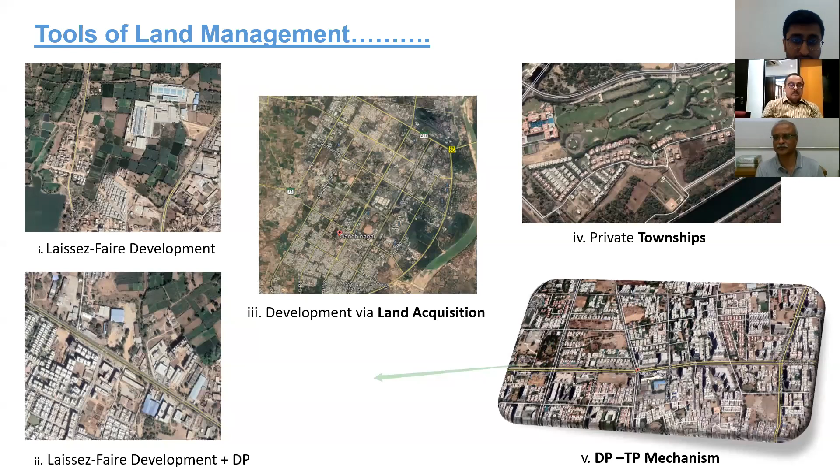The DPTP mechanism is much appreciated and successfully practiced, and this transformation mechanism has been used in Gujarat for more than a century now. I'll give you further detail in the next slide, but it dates back to the Indus Valley civilization. Why Indus Valley civilization?

Because at that time there was a grid pattern with access to basic infrastructure like sewerage, stormwater drainage, and water distribution network. When civilization started, the decision makers always considered the priority of health indirectly. Sewerage and stormwater drainage were originally present in the civilization valley - we get lots of documents and proof of this.

The current system evolved in the late 19th and early 20th century during British rule, as a response to the challenges of rapid urbanization. Its roots lie in the thought process of safeguarding the British army in colonial countries from epidemics like cholera, plague and malaria. Why did this new urban planning start? Because Britishers in colonial countries wanted to safeguard their military - they were living in England but wanted to control different countries in Africa and Asia. So from a far distance, they were more dependent on their army, and whatever they did was to safeguard their army - that's why this new form of urban planning started.

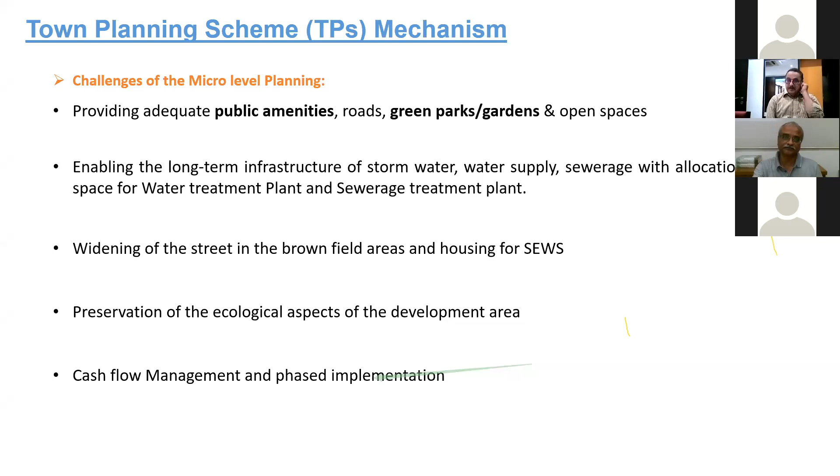Emergence of newer challenges in micro level planning. Why these new challenges? Because of COVID, we are rethinking micro level planning and particularly how we want to make changes in town planning schemes - managing peripheral urban growth, redevelopment and rejuvenation of older city Gamtal areas. Now the red zone in Ahmedabad is maximum in the Fort Wall area or Gamtal area. How to overcome such a pandemic situation through TP scheme is one of the challenges.

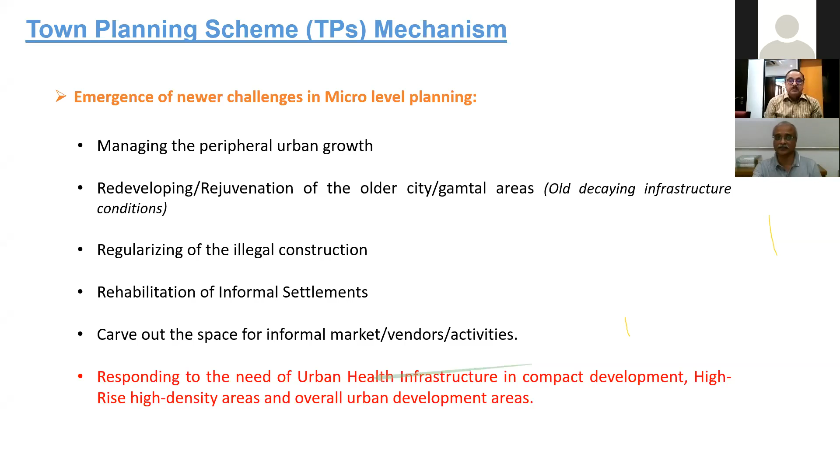Regularization of illegal constructions, rehabilitation of informal settlements, carving out space for informal markets, vendors and activities. Responding to the need for urban health infrastructure in compact development, high-rise, high-density areas and overall urban development areas. This point is very important as far as thinking about the town planning scheme for the coming time.

Over the past decade, we have witnessed the rebirth of an important relationship between urban planning and public health. Initially when urban planning started, we know it was started because of public health. Now it is time to again rethink the relationship between public health and urban planning, and how we can improve public health through urban planning or micro level planning.

Urban planning was itself a health response to poor living conditions in the urban development of the very early industrial era.

Why is integration of health and urban infrastructure important in planning? To address the risks and challenges arising from rapid urbanization. Tackling the growing burden of disease and health inequalities. To improve the ability of a place and its people to prepare for, withstand, and respond to a hazard, epidemic or pandemic. This last point is very important - how we can improve the ability of a place through the town planning scheme. I will discuss it in the next slides.

The integration of health and urban infrastructure is important in planning.

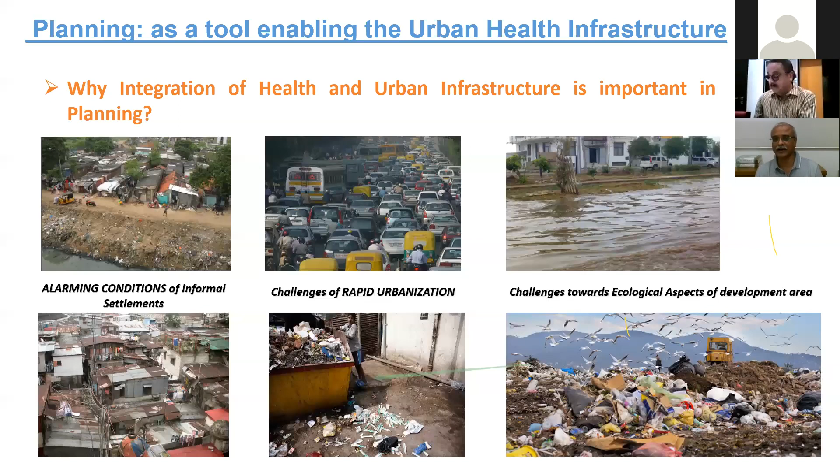So trial and error is always there in urban planning, as well as in the relationship between health and urban planning.

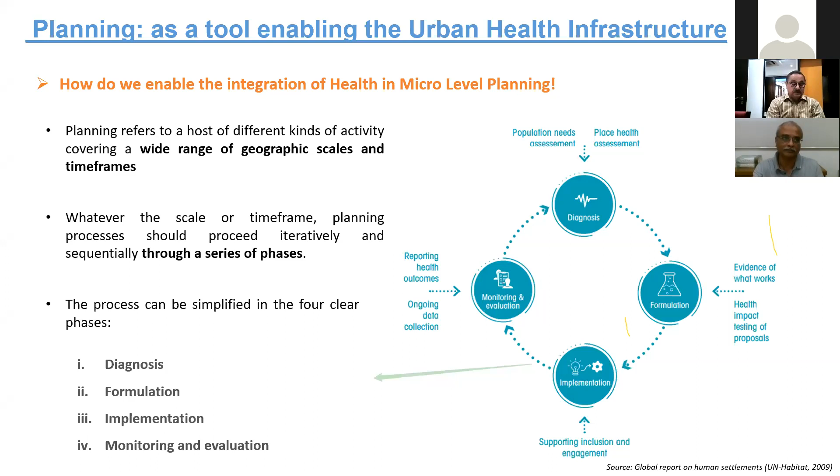Planning is a tool enabling urban health infrastructure, with three enablers: place, people and process. For place, we make proposals. For people, we make regulations. For process, we need finance. Accordingly, decision makers and stakeholders will behave and act.

And again we revise it: for place, the proposal; for people, we revise the regulations; for process, we revise our financing and controls.

Planning guidelines and standards can be improved through planning, such as housing density guidelines in relation to facilities, and building standards like daylight, air ventilation, insulation, and noise, all of which can be modified time and again.

Plans and strategies at the city and regional spatial level involve implementation, monitoring and evaluation. Planning as a tool—probably you can see this slide, but the major points are covered in bigger font.

Planning creates more socially inclusive places, better connected places—all such points can be achieved through proper Town Planning scheme mechanisms. This includes institutionally integrated planning, more compact places, well-designed and accessible green, blue and public spaces, planning better connected places, ensuring adequate access to health infrastructure, integrating environmental considerations, and planning places more resilient to climate change and natural disasters. All these points can be covered and addressed through town planning schemes.

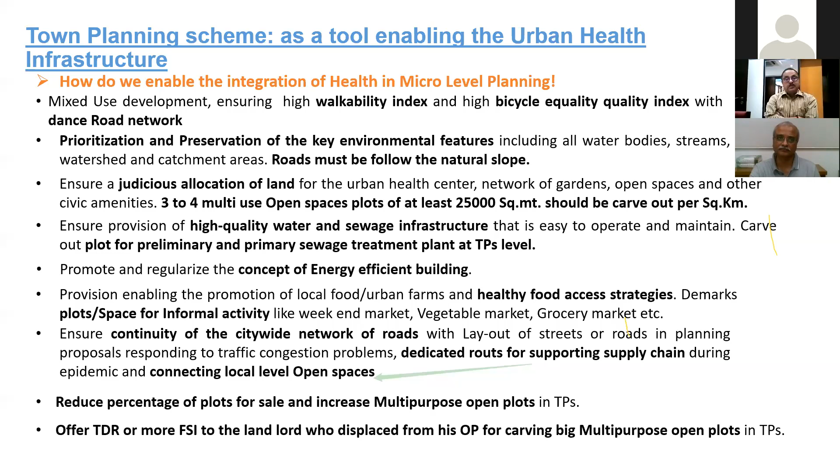Because of this planning intervention, we can get highly walkable neighborhoods, diverse land use mix and street connectivity. Because of the few points I suggested in the TP scheme, we get this type of result. Stimulating a healthy food environment and healthy climate, and aiming to discourage smoking, to reduce noise and air pollution and to promote physical activity.

See, when I was writing this, smoking is really an issue; you can say it is a social issue. Smoking is a social issue. During this lockdown, the pan gallas and everything were closed. Still, the smokers got cigarettes from the black market. But actually, lots of smokers I know accept that because of this type of lockdown, they reduced smoking or quit smoking. This is very important.

Instrumental in tackling the issues emerging with rapid urbanization and development by the preservation of ecological aspects of the planning area. Originally in the town planning scheme, we were not respecting the water bodies. But now, for the last 20 years, in whichever new town planning scheme we make, we preserve the water body and we make a garden or green space all around the water body. But we forget that we also have to safeguard the catchment area of that particular water body. So in the town planning scheme, we have to make such small changes, and ultimately we achieve the sustainable development goals and protect the ecosystems.

So for me, local area plan is keeping the city within the city. Now, LAP is not a new concept for the worldwide. It is a result of an ongoing process, not a planned process. Basically, development dynamics keep changing with time and growth. Keeping these dynamics in mind, the LAP for a particular city has to be planned and evolved.

Now, looking worldwide, LAP is not new. LAPs are prepared for different purposes: to protect the important qualities of the town, for distinctive precincts, for sustainable transport strategy, for sustainable mixed use like TOD policy, that's what we are doing, and special development areas. It can be cultural, heritage, or economic value.

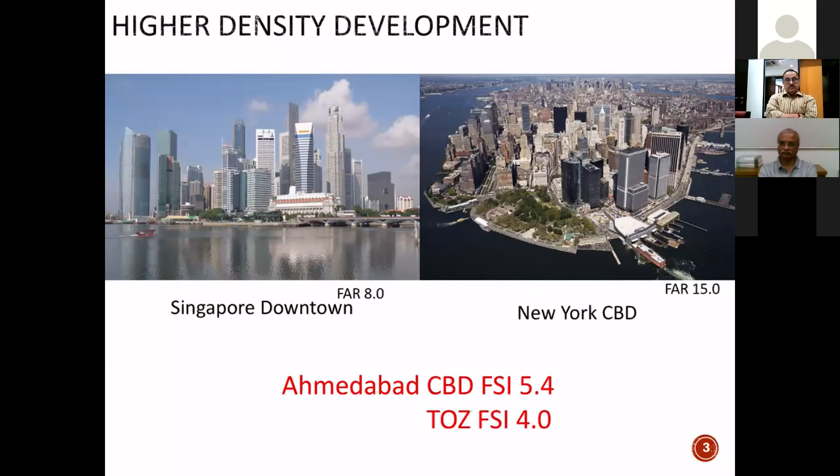Now, if we see the different cities in the world, they have reached up to FAR 8 or 10 or 15. So they have already evolved somewhere. The planning process has evolved time by time, and they have reached this level, and we are in the process of the same. Our city is still a developing city, and we are evolving the different processes.

Now, for managing the densification of Ahmedabad for the CBD and TOZ area, Ahmedabad has adopted this practice for implementation of the LAP. Basically, we have proposed the CBD and TOZ in the development plan, and we are planning the local area plan for this LAP area.

Now, the major idea behind the local area plan is to manage the growing density development, to provide efficient use of ground, to provide sustainable infrastructure, enhance and give an enjoyable ambience and public places, accessible and efficient transit connectivity, and provide the green transit network.

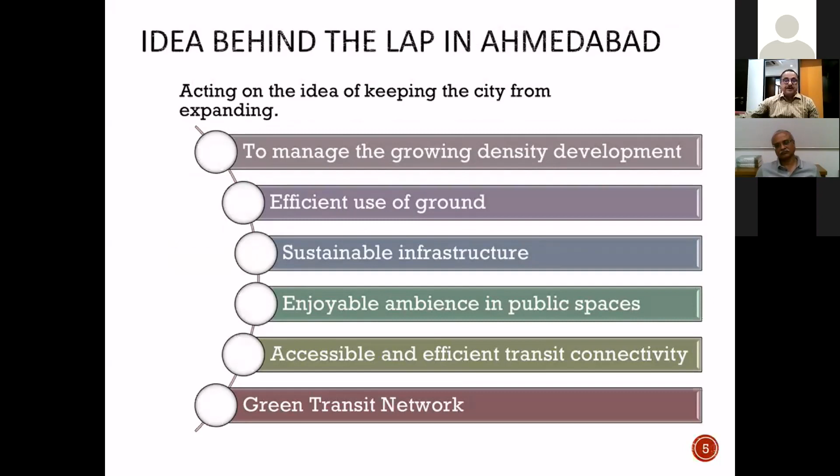Now, if we understand LAP, basically it's a sustainable community where people want to live and work now and in future. In terms of planning, if we redefine the existing developed, undeveloped, or developing area in terms of accessibility, walkability, connectivity, and plan for the future infrastructure, amenities, and utilities to sustain the future density and growth, that we can say is the local area plan.

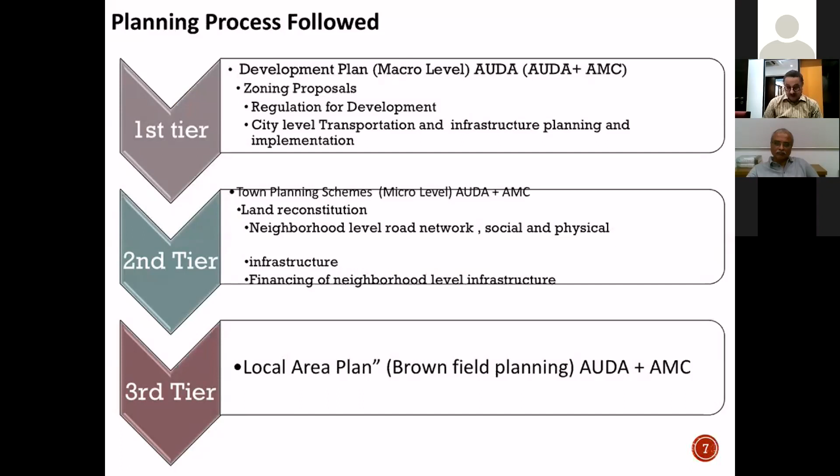As my senior officers and colleagues already explained, we are following the three-tier planning process. Earlier, we followed a two-tier planning process, the development plan and town planning scheme. And now we have added the local area plan, which we basically call the brownfield TP scheme or special area development.

Now, the Gujarat Town Planning and Development Act 76 was amended in 2014, and the local area plan has been added in it as section 76A. In that, the statutory provision has been explained very well. The process is the same as the town planning scheme mechanism.

We have to publish the boundary, we have to make a plan, then we call the stakeholder meeting and invite objections and suggestions from the people. We consider the objections and suggestions, modify the LAP accordingly, and the same shall be published in the official gazette again for inviting objections and suggestions, and finally that plan shall be submitted to the government.

Now let's understand how Ahmedabad has done this process, and it is the pioneer for this local area plan. So how have we done this? I would like to start with the development plan concept. When we were preparing the development plan, our focus was on compact city planning, and the pivot was public transportation. So vertical development was a must, and Ahmedabad proposed the transit oriented zone and CBD zone in this area.

The total Ahmedabad Municipal Corporation area earlier was 190 square kilometers. In 2008, it was increased to 450 square kilometers. And recently, we have added some more areas in the corporation limit, and now it is 503 square kilometers, while the AUDA area is 1866 square kilometers. The development plan was published in 2013 and sanctioned in 2014 by the Government of Gujarat.

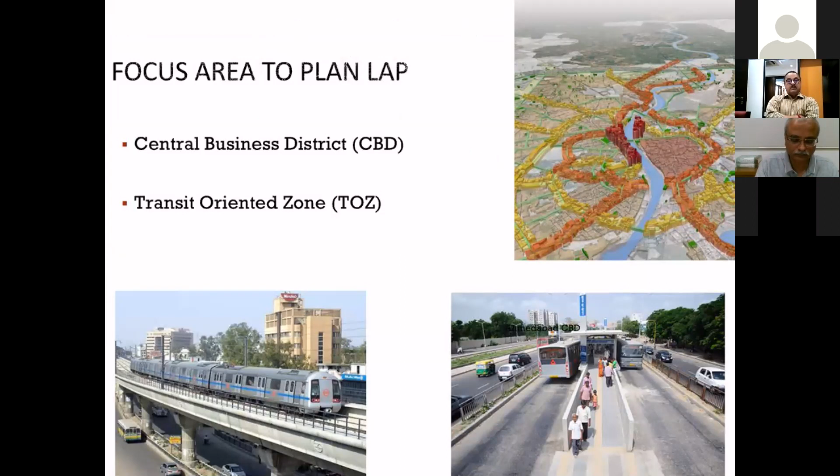When the government sanctioned the development plan, our major proposal was the CBD, Central Business District, along Ashram Road, and on the eastern side near the Gandhi Bridge, and the transit oriented zone, a buffer along the BRTS and metro corridor. The TOZ area is spread all over the city, and the buffer is almost 40 square kilometers, where the MRTS length is 40 kilometers and BRTS is approximately 120 kilometers.

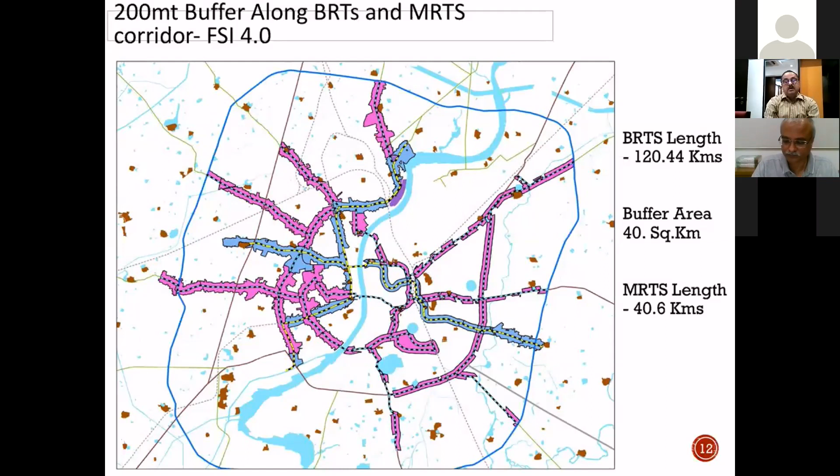So for ease of planning, we divided this whole area into different small components. The area can be predominantly residential or predominantly commercial, depending on the characteristics. We can plan specially for that area, and we can also give a special GDCR for each plan.

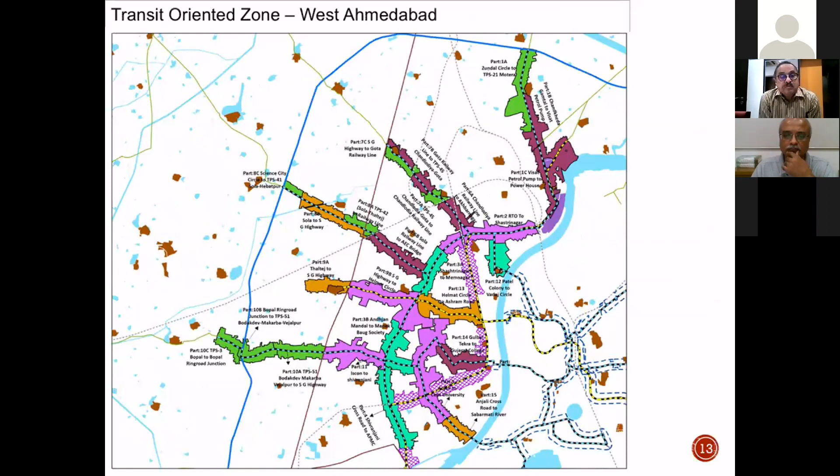Now, basically, when we are saying the local area plan, we want to improve the quality of life. We want to enhance the existing situation where we are adding up the new FSI in the city, which is the existing city. Already the development plan is there since decades. Already the town planning scheme mechanism has been prepared and implemented since years back, and the area is already developed. How can we enhance the quality of life so the city can be sustainable for future densification?

So in that, we are adding spaces for the public realm. For that, one thing is we can add on space for public places and make our public transportation sustainable. As well, we can improve the pedestrian spaces by improving the street network.

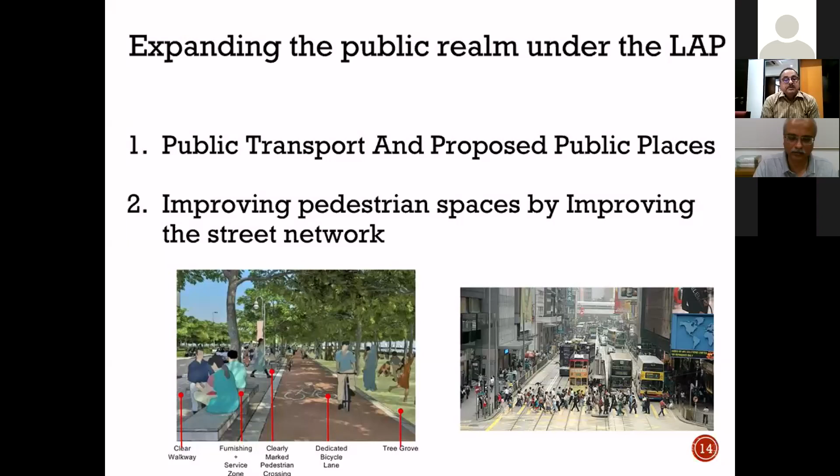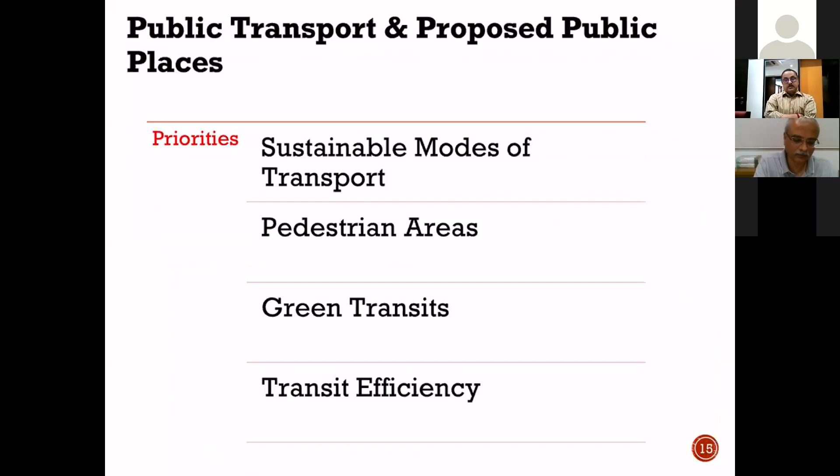Now, when we talk about sustainable public transport or enhancing the public transport, basically, we are adding space for the pedestrian area, enhancing green transit, increasing transit efficiency, and trying to provide last mile connectivity. Even for the sustainable mode of transportation, we have to relate the different modes of transportation, how we can best efficiently use the different modes of public transportation.

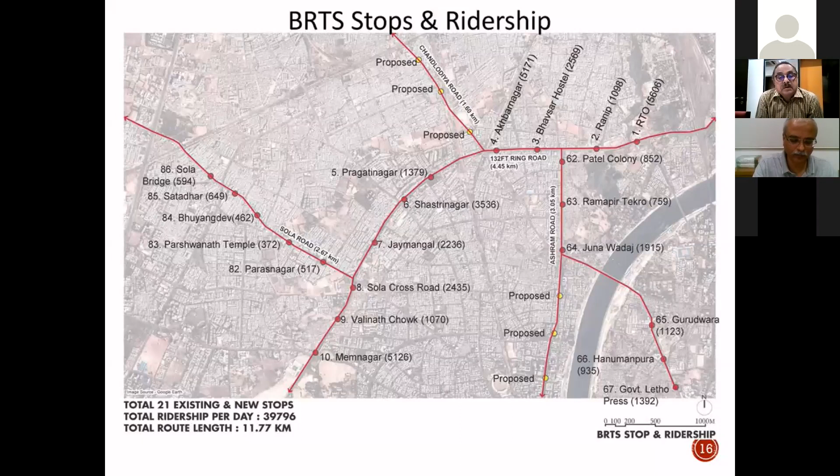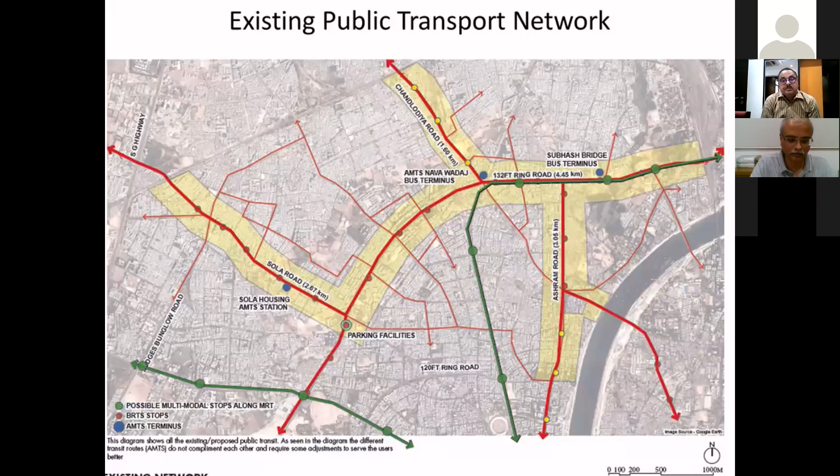This is the existing AMTS route in the same area. And these are the existing public transport networks: the green is the MRTS line, then AMTS and BRTS lines. So how efficiently can we use this public transportation? We have added new connections within the local area plan area, within the transit corridor area, as well as between two transit corridors. So between two local area plans, the area in between is also very important for us, and how we can enhance public transportation in that area. That is our first lookout.

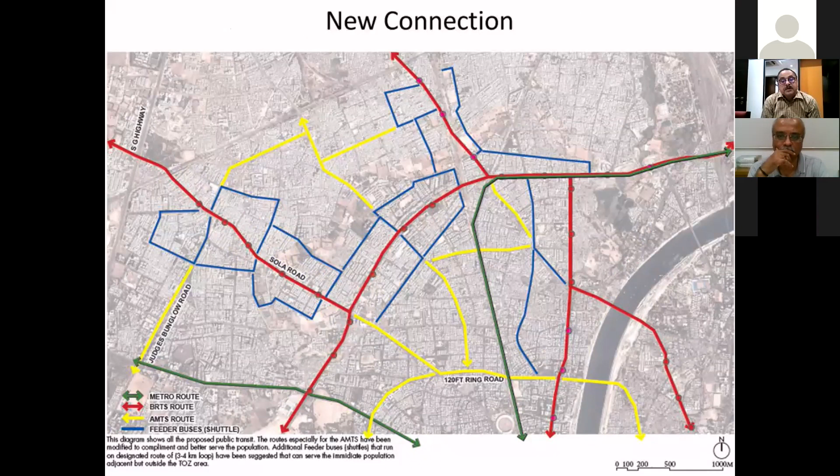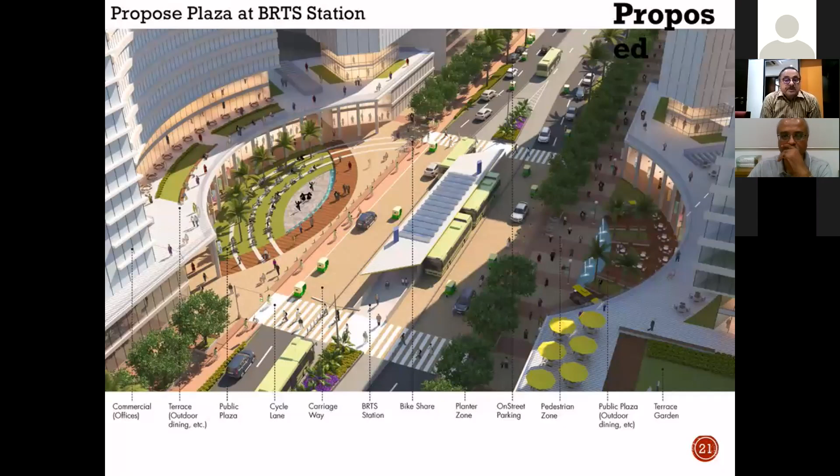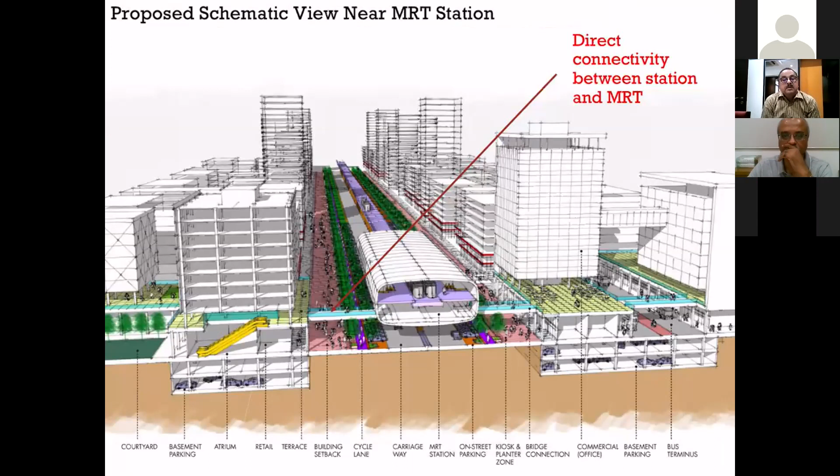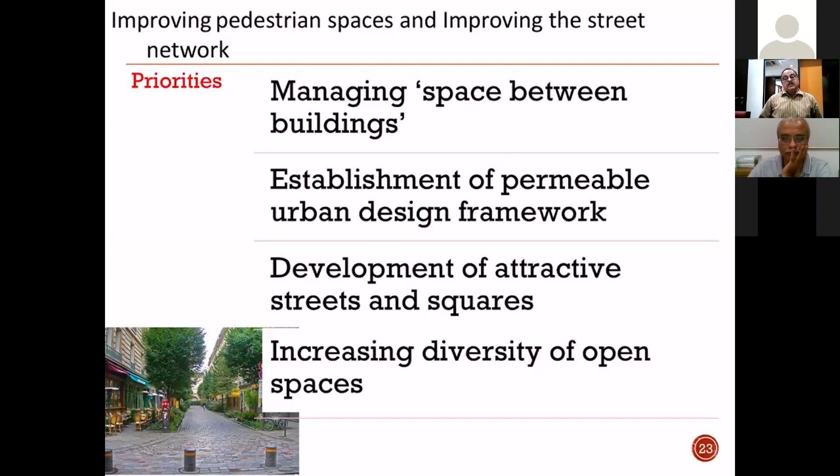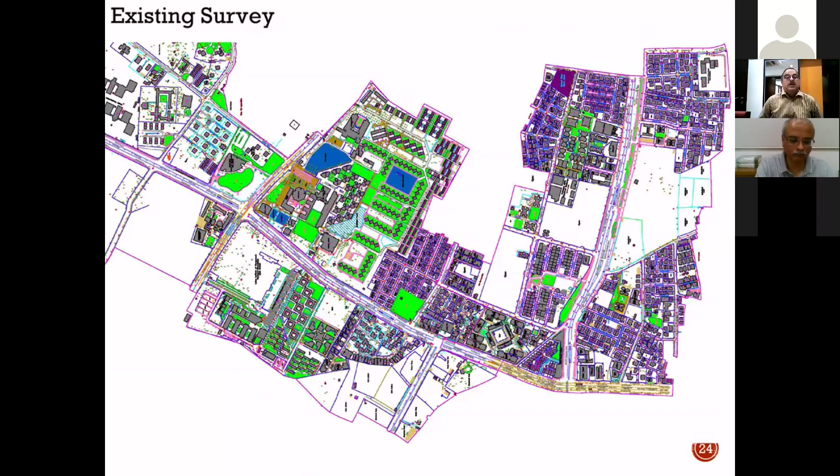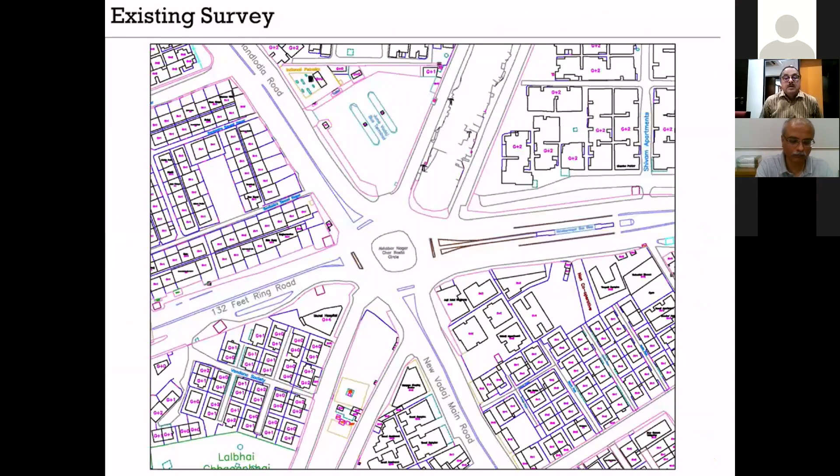Now second, our criteria is to improve the pedestrian space and improve the street network. So basically we are managing space between the buildings. We are providing a permeable urban design framework, the development of attractive streets and squares, and increasing diversity of open spaces. For that, a lot of studies and analysis have been done, but our base work is the total station survey. So a fresh total station survey has been done, in which we have taken care of all the physical parameters: road network, building typology, building height, and all the physical aspects existing on the site.

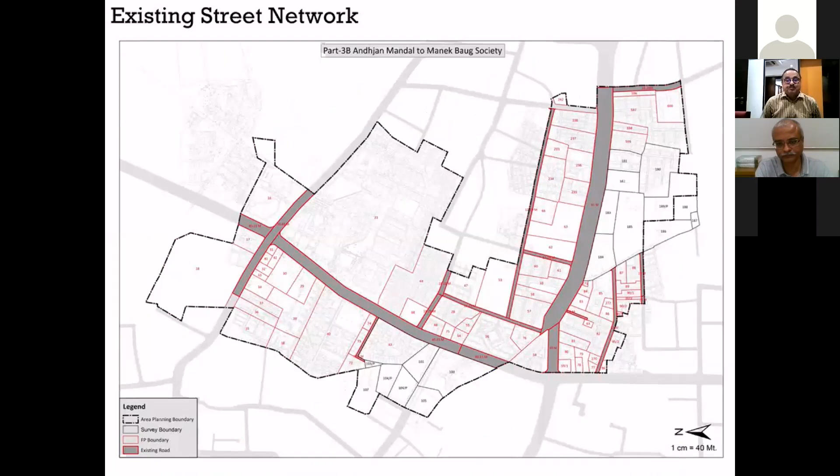This is the existing street network. When we have laid down the development plan roads, gray is the TP scheme road. As we all know, Ahmedabad has been following the town planning scheme mechanism for years; in Gujarat, we have been following the town planning scheme for 100 years. So we have a very good existing street network, with defined final plot boundaries and regular shape and size plots. But now how to enhance this area and make it more sustainable for the future FSI? That is the question.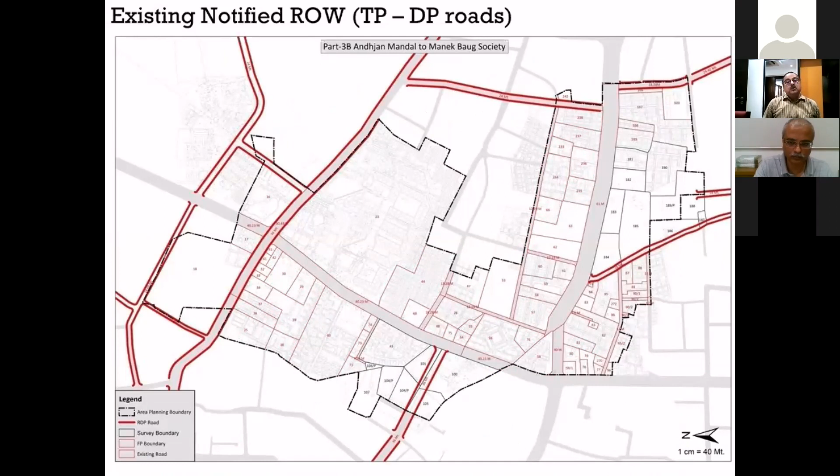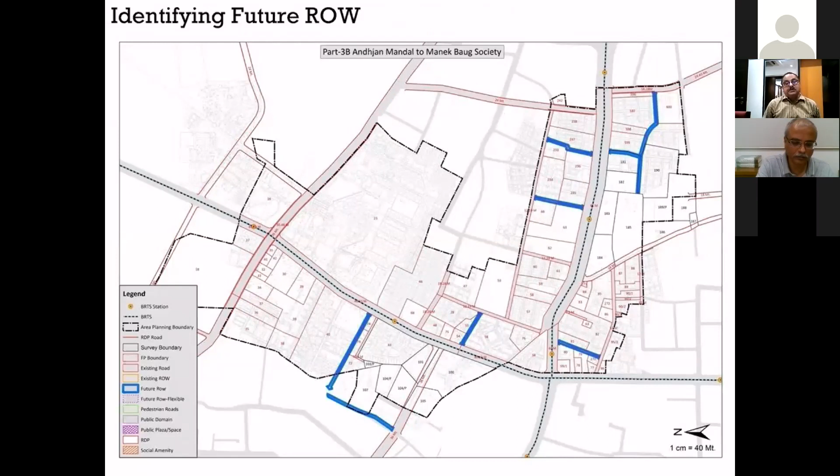So we have added a few future roads. As I said, this is managing the space between the buildings. Between two final plot boundaries where space is available, and where it is required to connect with the public transport corridor, we have planned new connections. So new ROW has been proposed.

Another new concept has been introduced in this local area plan, that is the flexible road. Now, what is a flexible road? Earlier, when we put a red line or some road network, it was fixed that the road will pass through between this and this alignment.

But when we say flexible road, it means a large chunk of block under one ownership. It can be a trust, it can be an educational institute, or it can be a large private society. For example, it can be Gujarat University, it can be Gujarat Housing Board, it can be a large private society which has potential for redevelopment.

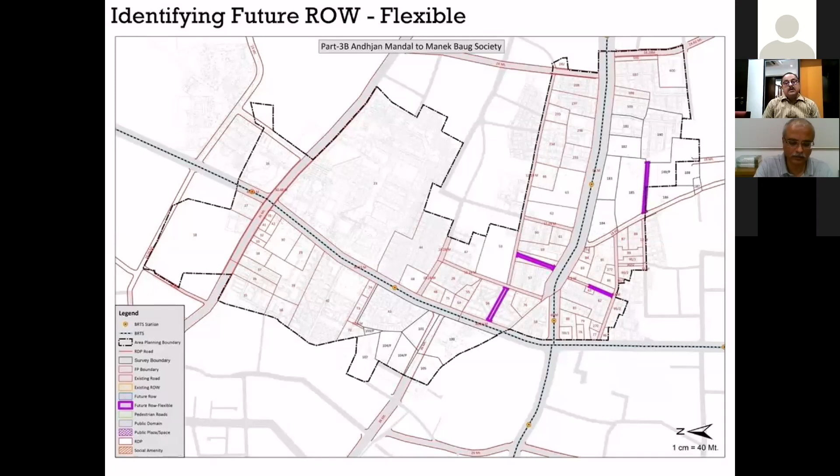And now as they are getting the 4 FSI, whenever they go for redevelopment, they have to give a connection between A to B, from the public transport corridor to the end road. And that road they can shift 25 to 50 meters on either side for ease of planning and ease of architectural design. We have also identified a few pedestrian connections.

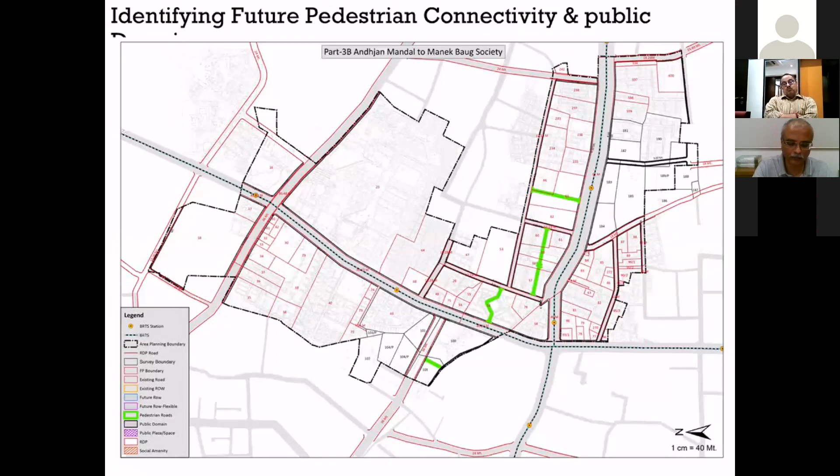It can be the society road. It can be the small, narrow 3-meter, 4-meter wide street between the buildings. For that, we might need to remove the existing compound walls, or remove the gate between the societies. In this whole process, we have reduced the block perimeter.

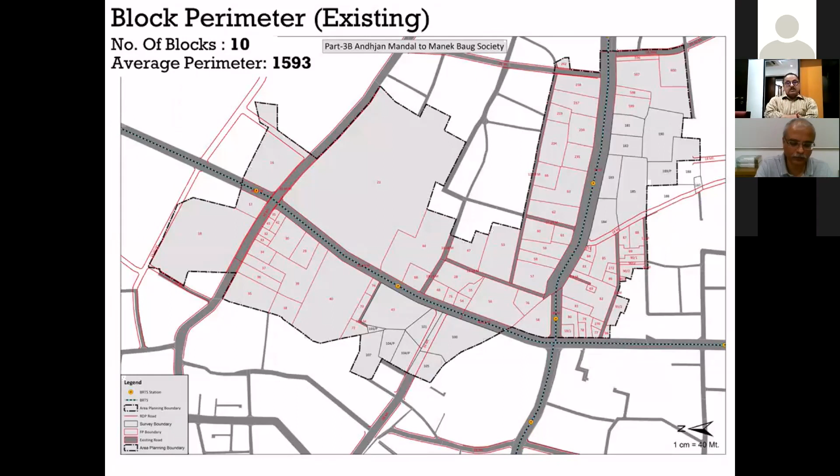And one more concept we have introduced that is quite important, that is the public domain, the space for the pedestrian. The whole crux of this planning is how to enhance public transportation and how to provide space for pedestrians, how we can provide better space. So in this, we have introduced in our GDCR that we are giving the front margin. Each final plot needs to keep its front margin open.

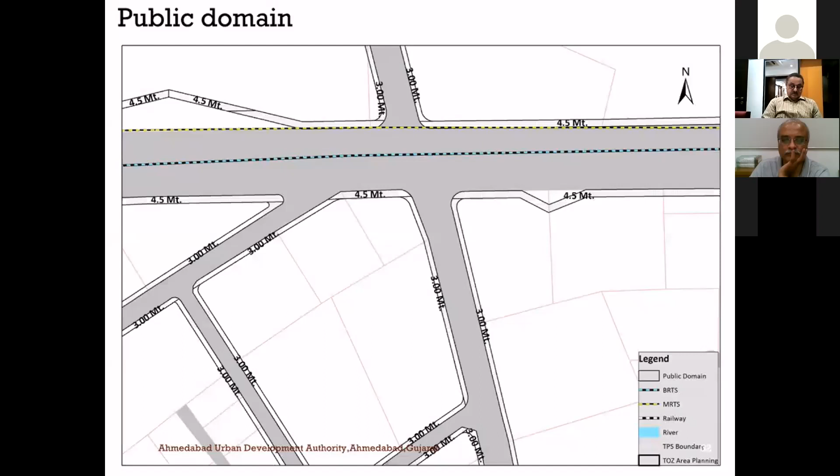From that front margin, if the road is up to 18 meters wide, they have to keep 3 meters of space for the public domain. And if the road is more than 18 meters wide, they have to keep 4.5 meters of space open for this public domain area. And that space might be used for a future street or pedestrian walkways. Now, even the side and rear margins shall be part of our future street.

As I say, a future road can be a large 9-meter road, it can be a 7-meter road, or it can be a small street. Pedestrian or cycle movement can be accessible from this marginal space.

And finally, we prepared a plan in which we identify the public plaza, that is the small purple dot, and the social infrastructure, the brown hatched plots. Now, the plaza can manage the spillover of the major transit station, and the social infrastructure can provide future amenities to the citizens. It can be for parking, a fire station, a police station, or other future requirements as per the city's need.

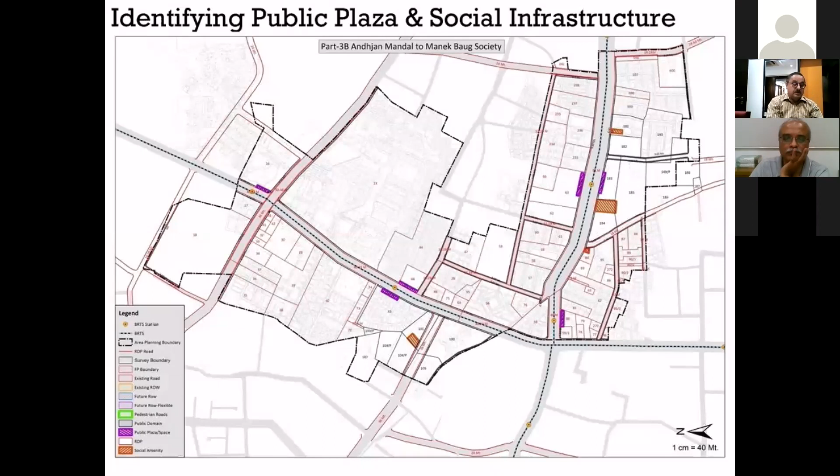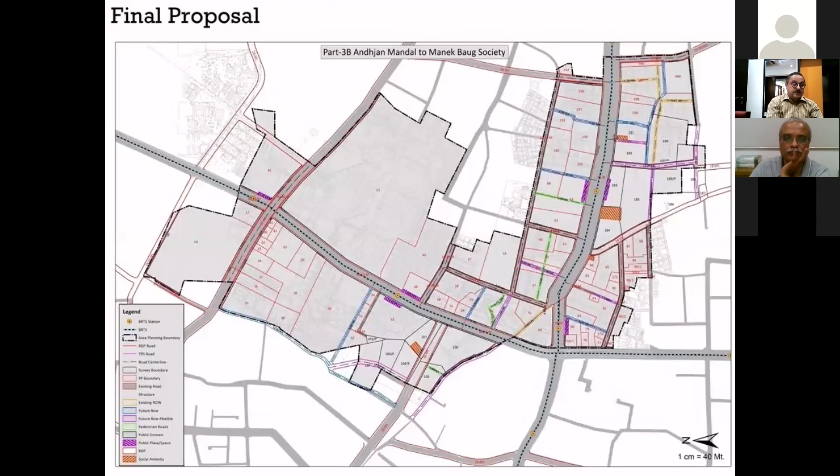Now, the final proposal, which incorporates the road network, plaza and social infrastructure, is prepared and kept open for stakeholder consultation. So all people can come to our office. They can check their plan, and they can give their objections and suggestions within the 15-day period. After that, we need to consider the objections and suggestions. If required, we modify our local area plan and again publish it in the official gazette.

Again, we re-invite objections and suggestions, and the final plan needs to be submitted to the government. Now, during this whole process, wherever open space is available, where government plots are available, we look at how we can provide better parking facilities and lots of other things.

The roadside sector has been given to a private developer for development. And the next sector, the B sector, has been developed by the developer, and they have to construct EWSH 40-square-meter units for our slum residents, to rehabilitate those people.

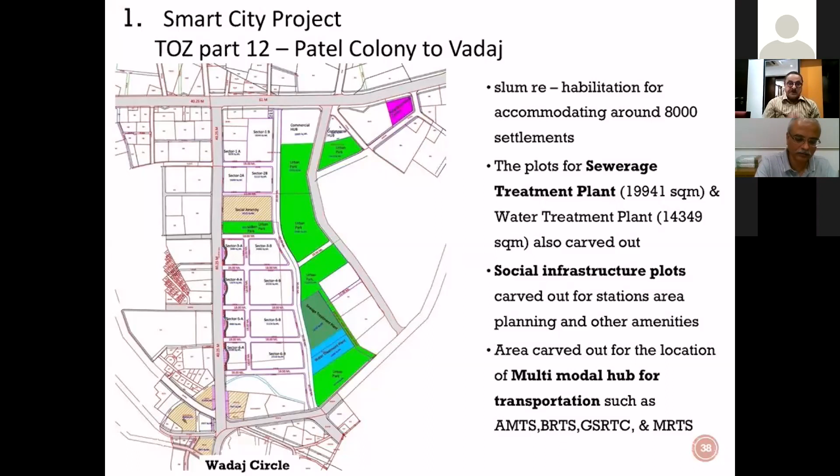There, a 60 MLD sewage treatment plant is working. We also provide a social infrastructure plot in the southern part of the map where the hatch is. There we have given space for the fire station, and a multimodal hub is also planned in this project.

On the northern side, AMTS, BRTS is there, the GSRTC State Transport Terminal is there, and the metro is also going through this road, which is the major connectivity between Gandhinagar and Ahmedabad, the core city. The blue color is the intermodal hub we identified for this area.

The tender has already been floated. Out of all sectors, tenders for 3 sectors have already been commissioned, the developer has been selected, and work has started in this area.

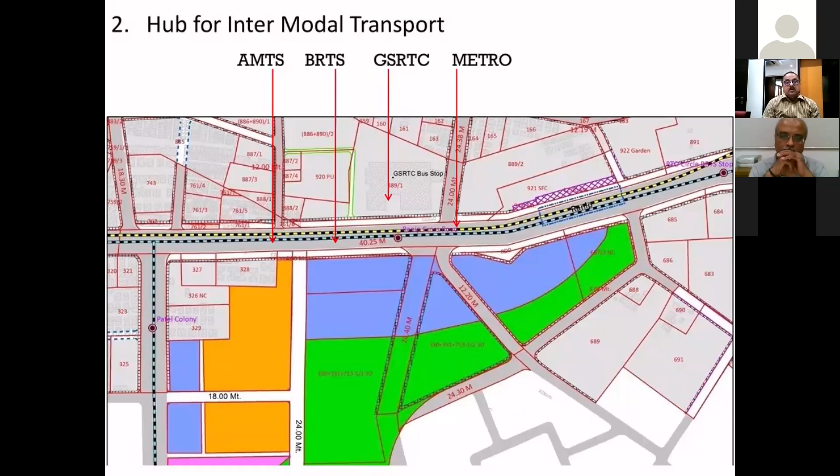Out of that, we have also identified a few gardens and public spaces, and we also designed and gave an improvement plan for the gardens and public spaces in this local GDCR for the TOZ area. We are already

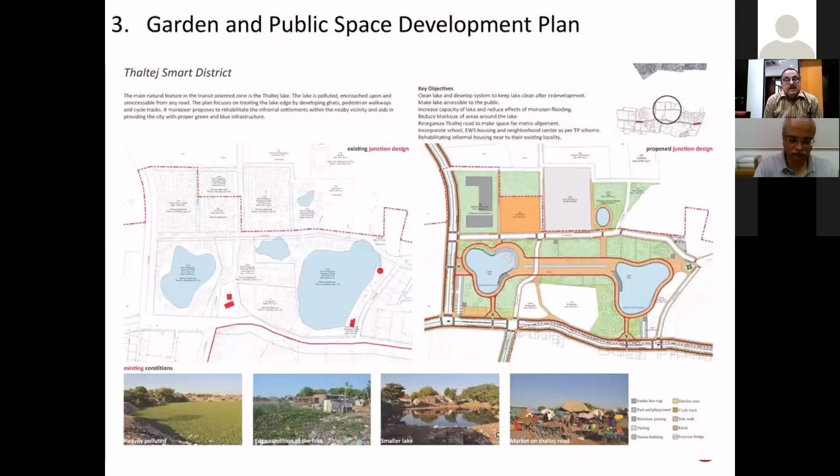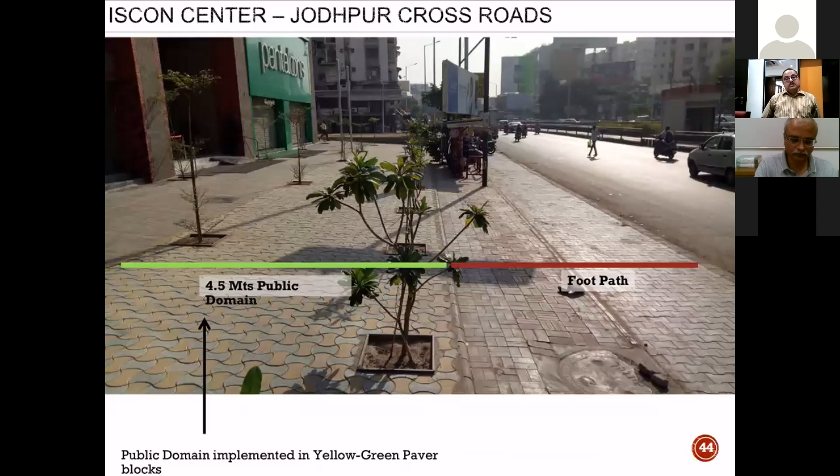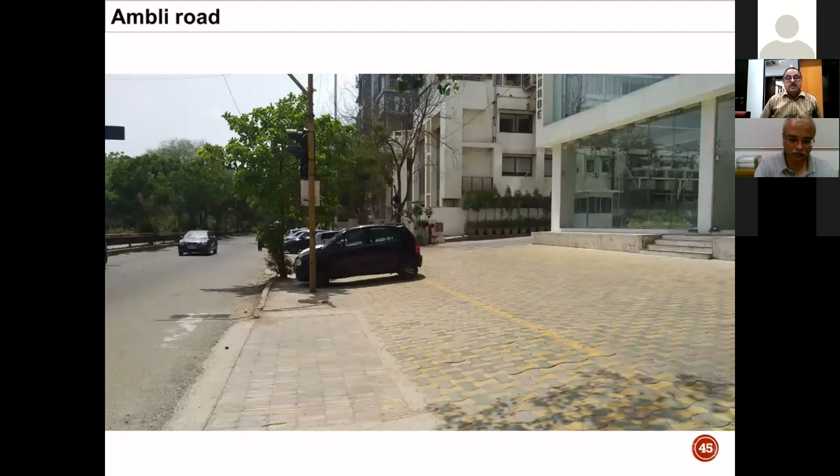This is another example, Ambli Road. So that people understand this is pedestrian space, and this space will be owned by the authority in future, we have asked them to use green and yellow pavers to identify the space. And this is within the city, Rakhyal Road. Rakhyal is a very dense area near the old city, and there also people are redeveloping and we are getting the public domain.

Now, to summarize this local area plan, basically it's a market-driven exercise. We cannot implement and enforce it within a particular time limit. But if the market is there, if the demand is there, if the market is willing to use the higher FSI, we'll definitely get this public domain, we'll definitely get the new connections, and the area will be redeveloped.

In this approach, we minimize the need for demolition and acquisition. We also improve the walkability of streets by splitting the existing large blocks into smaller walkable blocks. The increased area under public domain would help in providing widened walkways, street furniture, bus stops, etc., to improve the pedestrian environment, and in this way we can provide an enjoyable ambience in public spaces.

By providing public plazas, we can make efficient use of the ground. We can manage densification in a better way. And this methodology adopted for adding new streets in the city assures ease of implementation and market feasibility. Thank you.